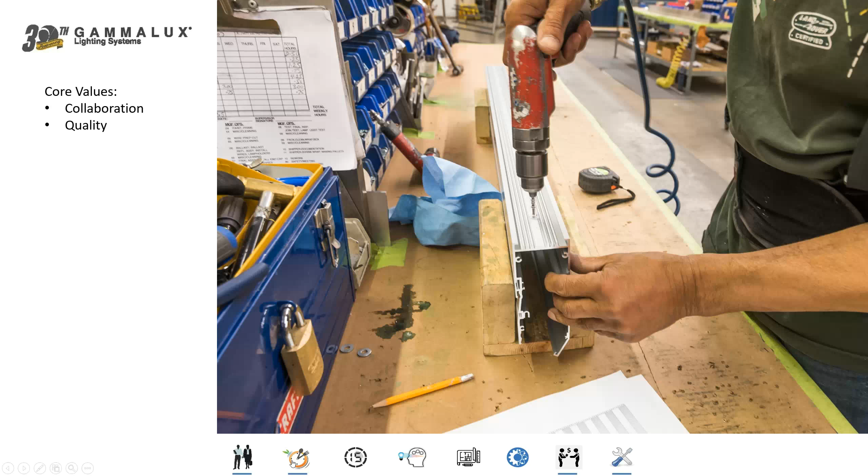And then lastly, integrity. The truth is sometimes things go wrong, and it's on every manufacturer to go about things in a conscientious manner, to be responsive when it looks like maybe even things were their fault. And so at Gammalux, we dive in. We want to understand what went wrong so that we can come up with a practical solution, because that's how we build confidence in others, by being responsive to their needs. So one of our core values of collaboration, quality, and integrity is going to be on each one of these pages, which I think is a good reminder of why we operate the way that we do.

Our most popular product line is the G-Beam or the Gammalux Beam series of fixtures, and this is that group of square and rectangular forms that's been so popular over the last 15 years or so. Now, the truth is there are multiple manufacturers that make very, very similar stuff, and so it's difficult for a manufacturer to differentiate themselves simply based on product, because the reality is as soon as they reveal a new product at LightFair, within just a few months, there are other manufacturers making the very same thing. So for Gammalux, what we figured out is how to create value within a project and help the other people that are involved in that project to do their very best work and possibly build their reputations along the way.

So as an example, we'll take a look at this particular situation where we've got fixtures coming up the wall and across the ceiling. This is a very common type of installation these days, recessed fixtures in the walls and in the ceilings in a pattern. But what's uncommon is the fact that the wall and the ceiling don't touch each other. This is very unusual. Now, this was not our idea. This was the architect's idea to convey the concept of the ceilings floating up and down on rails of light at Schindler Elevator Corporation headquarters, where they make elevators. And so now, because the walls and ceilings don't touch each other, that means there's going to be a gap between the two. It's about a 3-inch gap that was left.

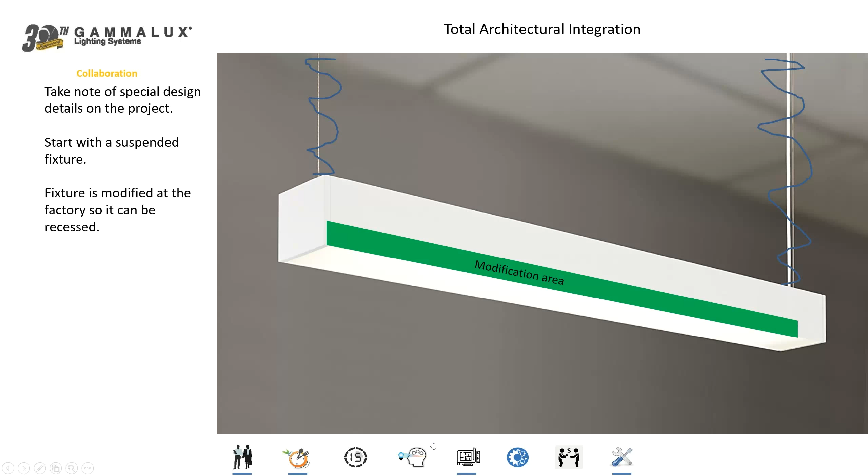So rather than using a recessed fixture, what we did is we took a suspended fixture with smooth sides on it, and we modified that fixture just in the area where it needs to interface with the wall or interface with the ceiling. But we did not modify the fixture in the area where it was going to be exposed inside that 3-inch gap. And what this does for us, it now allows us to take what used to be a suspended fixture and recess it. Now, when we do that, it's the smooth side of the unmodified portion of the housing that's actually visible inside that 3-inch gap.

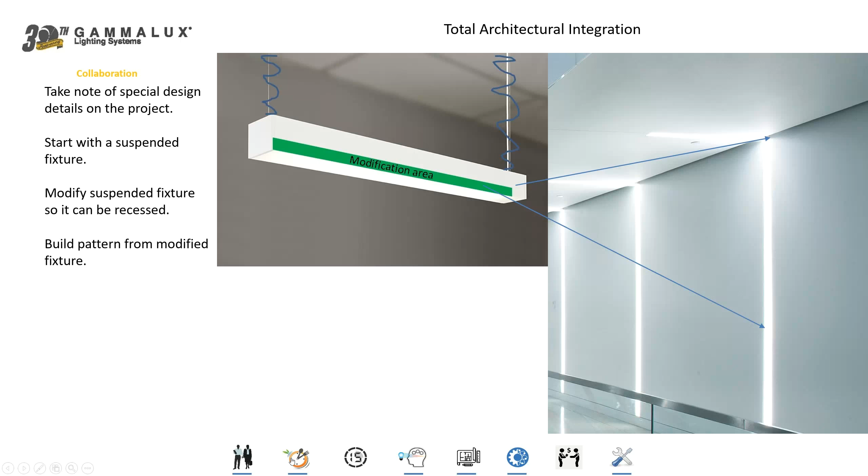Now, as you're considering projects like this, you also have to be realistic about price, and of course, VE conversations definitely come into play. So, when you're considering a VE, you also need to be conscientious of how that other manufacturer operates. See, most manufacturers are going to provide 2 fixtures, one in the wall and one in the ceiling, and then it's up to the installing contractor to get them to join together.

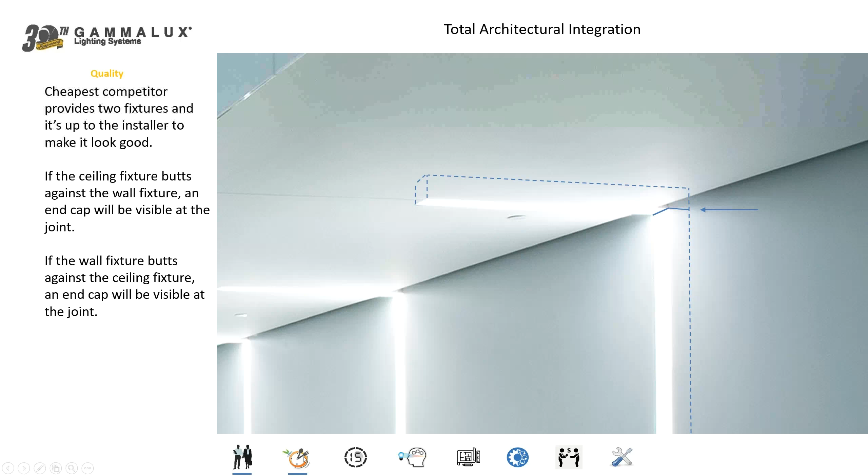Well, the problem with having 2 separate fixtures is that the fixture in the ceiling is going to have its own end cap. And then when it's butted up against the fixture that's in the wall, you'll see that visible end cap. Or if maybe the fixture that's in the ceiling extends into the wall, well, the fixture that's in the wall is going to have to butt up against the bottom of that ceiling-mounted fixture, and again, you'll have a visible end cap.

Now, this is certainly something you have to avoid, where the installing contractor doesn't know that these are going to be 2 separate fixtures, and then the fixtures arrive at the job site, and the contractor has to try to figure out how these are going to be installed in the space, and sometimes the solutions are not so pretty. So we want to avoid that.

Now, maybe a better manufacturer, rather than providing 2 fixtures that kind of get butted up against each other, might create a miter joint that the installing contractor has to put together back behind the wall and above the ceiling. And of course, in theory, this works out, but in reality, it could be quite difficult.

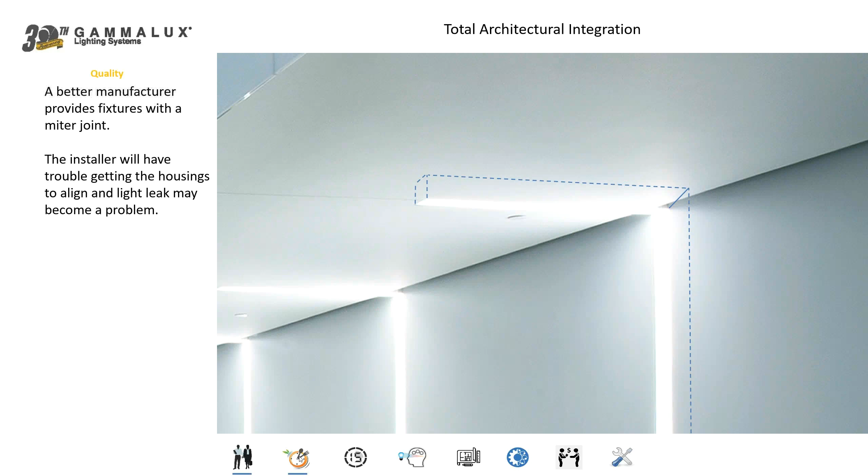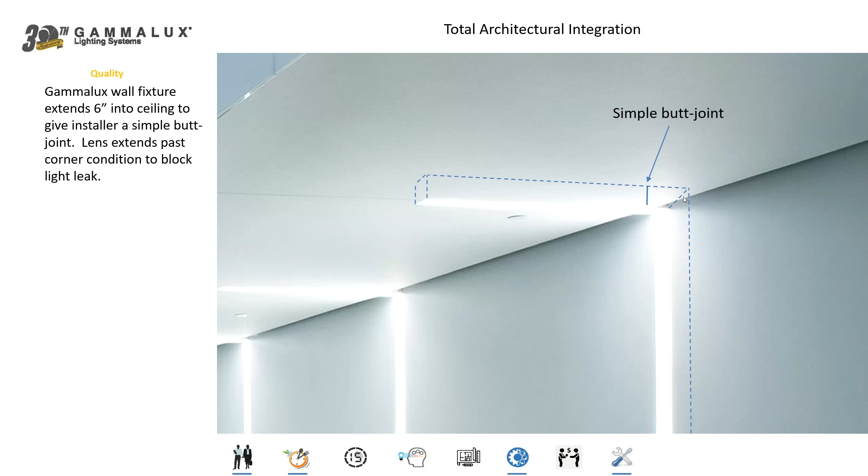So at Gammalux, what we do is we actually provide an L-shaped fixture that comes up the wall and across the ceiling a few inches, so that the installing contractor is simply working with a very simple butt joint between those 2 elements, the recessed ceiling-mounted fixture and the one that's coming up the wall and across the ceiling. Now, we miter cut and weld that corner at the factory as a perfect 90 degrees, so we ensure that everything is going to fit and work properly in the space without any guesswork and without any, how shall I say, beat to fit in the field on the part of the installing contractor.

Now, this could potentially cause a lot of problems, because every distributor and contractor who are bidding on these jobs, they all have different interpretations of all the parts and pieces that are necessary in order to be ordered, so that they can complete that pattern. And so what ends up happening is they send inconsistent quote requests to the sales office. Now, the sales office can only answer the questions that have been given to them, so they're providing different answers to all the distributors that are requesting quotes on this thing, and it creates this inconsistency in all of the quote requests. So what we want to do is avoid those problems by actually working with the original design intent from the designer.

What we want to do is find out the original design that was dreamed up, and we want to provide what we call a development drawing. This development drawing takes all the details as we know them at this time, all the dimensions, the angles and such, and we're going to create for you a development drawing with all of the engineered details as part of that drawing. Now, along with that entire pattern of fixtures drawn from an engineering standpoint, we also provide a complete part number for the entire pattern of fixtures. One part number which includes all of the components. And you see that this makes sense.

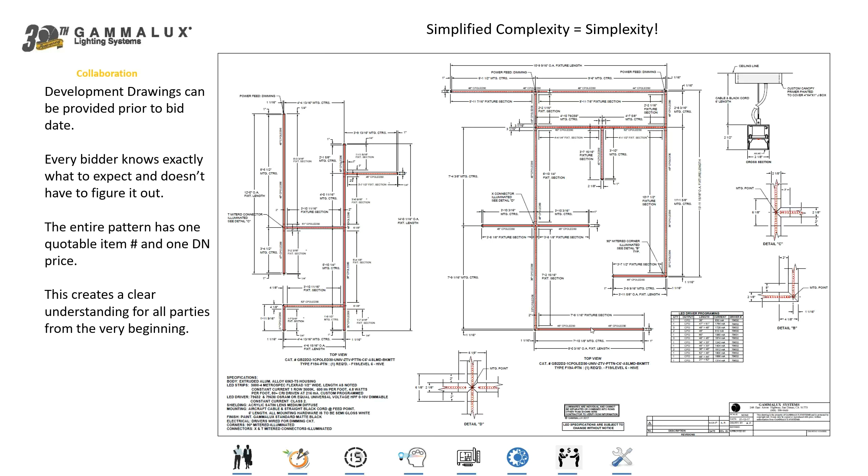So, along with the one part number for this entire pattern, we also provide one quotable price. And once the sales office adds the distributor and contractor markups, that net purchase price and installed price can be given to the specifier to then be passed on to the owner to create a real understanding of what this pattern should actually cost, rather than dreams and hopes and maybe it's within the budget. So we want to handle those things with knowledge from the very beginning, and the development drawing helps us to do that.

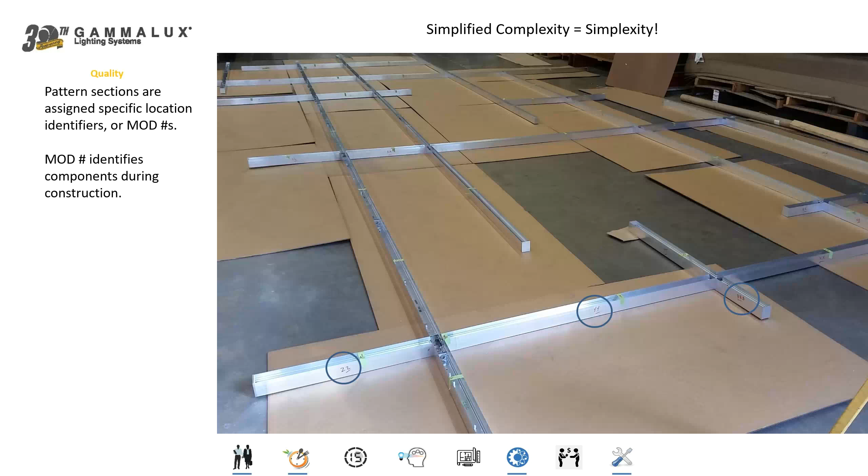Now, because this is all one part number, obviously we have to identify all the individual components in that pattern of fixtures, so we apply what we call mod numbers, or module location identifiers, to each of the components in this pattern of fixtures. Now, this mod number follows each of those components through the entire production process. So again, we at the factory, as well as the customer, know exactly where everything is supposed to go in that pattern of fixtures.

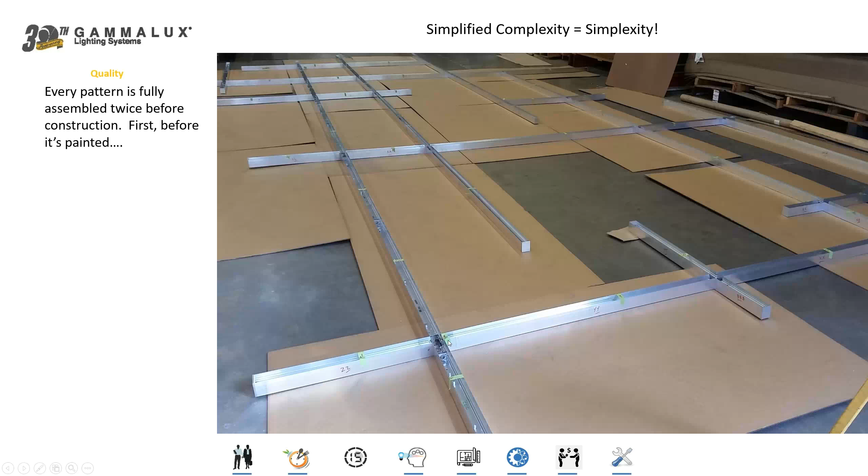Now, everything that we build at Gammalux is actually fully assembled twice before we pack it and ship it. First, before it's painted, to make sure all the dimensions are correct, make sure all the joining mechanisms line in and lock together the way they're supposed to, all the angles are correct.

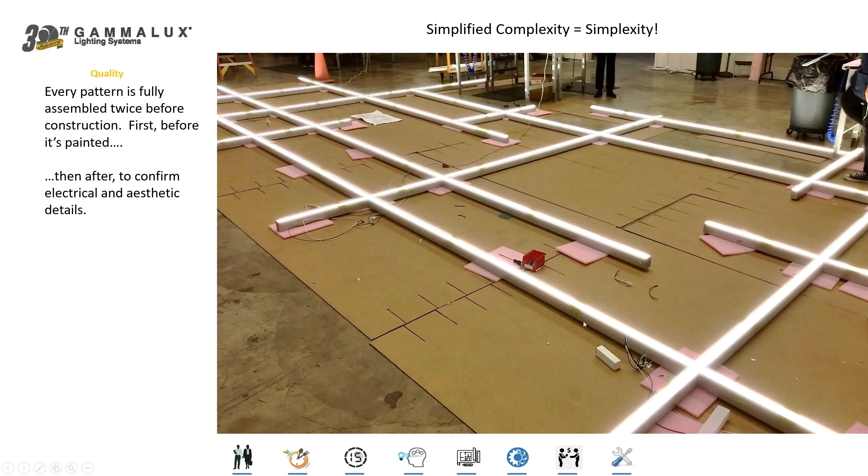Then we take the whole thing apart, paint it, put in the electrical, and reassemble the entire thing, checking every circuit, every battery pack. We're going to dim the whole thing up and down. We check the occupancy sensors, the daylight harvesting sensors. We even check the finish of one housing to the next in continuous runs to make sure that everything looks and performs the way that it's supposed to before we pack and ship.

Now, those fixtures are each marked with their individual location identifier, so the installing contractor knows exactly where everything goes at the job site. We include that location identifier on the fixture itself, also in the UL label, the identification label that's inside the fixture. We put that location identifier on the bubble wrap of the fixture, and then on both ends of the carton. So if you're looking at this side of the pallet or that side of the pallet, you will actually know exactly what's on that pallet.

Now, before we ship it out, we take a digital photo of that pallet to ensure that we know exactly what was on the pallet, and we can also provide that to the customer. And maybe if in case one of the modules gets lost, we can show exactly where it was on the pallet, and hopefully they're able to find it at the job site rather than having to reorder that one element, and then we have to wait for a lead time for that item to be built.

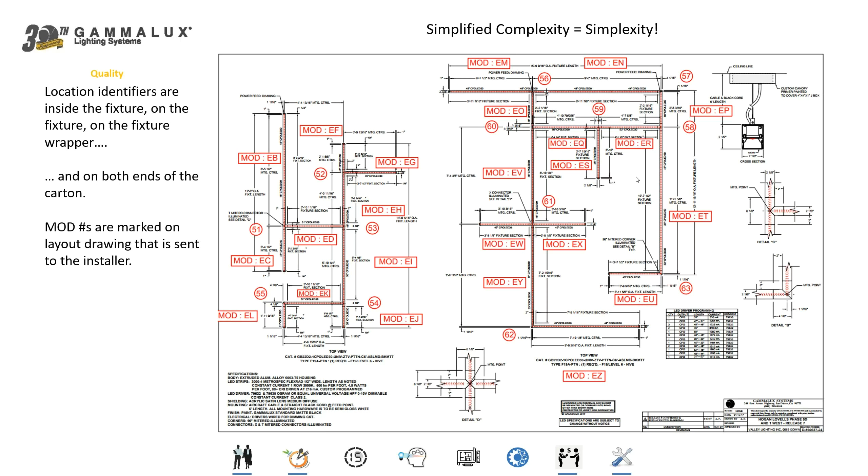Now, when we send the pallet of fixtures, we also provide a new layout drawing with all of the mod numbers or the location numbers overlaid onto that layout drawing, so that, again, the installing contractor knows where everything goes. As much as possible, we try to include all of the fixtures that are going to be required in that pattern or in a continuous run on the same pallet.

We don't want to send all the 4-footers on one pallet, all the 8-footers on another pallet, and then the hanging parts are shipping out next Tuesday, like some of our competitors do. We want to make sure that everything is on the same pallet as a complete package so the installing contractor can work quickly and efficiently at that job site.

As a matter of fact, every job that ships out ships on a custom-made pallet that is 2 inches longer and wider on all 4 sides than any carton on the pallet. Because we know exactly what happens. You know, if we make a 10-foot fixture and put it on an 8-foot pallet, you know what's going to happen in shipping, right? You're going to have damaged ends on your fixtures.

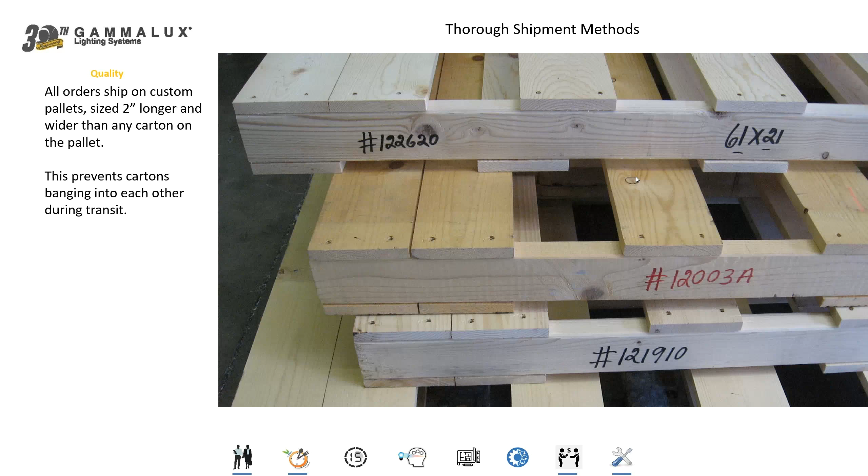So even if we make a 4-foot fixture, we don't put it on a standard 4-foot pallet. We'll put it on a custom-made 4-foot 4-inch pallet so that there are 2 inches of air gap all the way around the carton. So as the shipment is rumbling across the country, it's the pallets that are banging together and not the fixtures themselves.

Now, we can integrate other manufacturers' components into our fixtures.

Say, for instance, you're doing a job where you want linear lighting systems and then you also want some track heads. Well, we can actually work with that track manufacturer to get those track heads built in as part of our linear lighting system. What this does for you, it cleans up the ceiling system, which is very nice, right? You don't have all that mumbo-jumbo all over the ceiling, so it cleans things up, very nice for the architect or the interior designer. It still maintains all of the features that those various lighting elements have, so the lighting designer likes that. You still have all the same lighting characteristics in the space.

Now, because this is all built in as one housing, it's one part number for the distributor to order, which is nice, and also one shipment for them to have to track, which is also very nice. And then for the installing contractor, it's one housing to put up in the space instead of multiple. So what we're doing here is we're creating value within the project using all the components that would have normally had to be used anyway, but building them in such a way that it actually helps everybody else to work more quickly and efficiently throughout the job, creating value within the project.

Now, if you want to have fixtures embedded into the walls or into the ceilings, usually you don't want to see that flange that goes all the way around the fixtures, right? That kind of frame that's visible. So you specify what you call a flangeless fixture. Well, those flangeless fixtures do have a flange on it, but it's a mud flange. It gets mudded over and painted out here, so you don't see it. Well, we have the same thing as well.

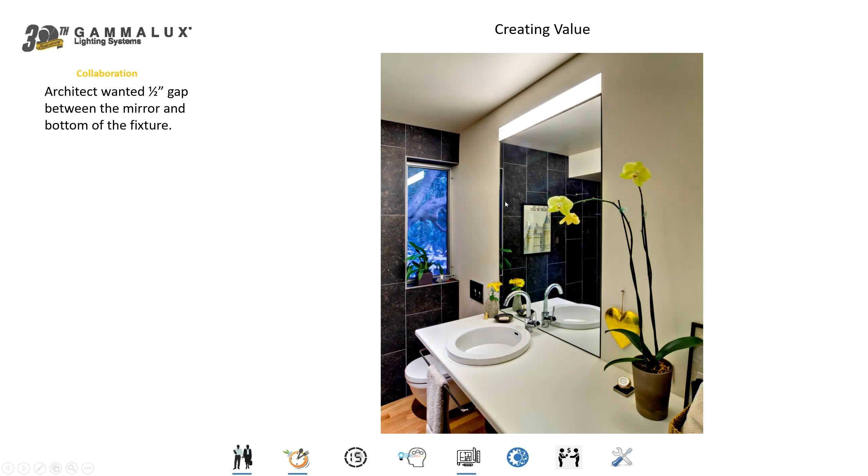Now, let's talk about a little modification to that mud flange. Here's an application in an architect's private residence in his guest restroom where he has this half-inch reveal or half-inch gap all the way around the mirror. So the mirror's kind of floating in space. Now let's take a closer look, and you can see that gap here. Now, normally we would put our mud flange around all four sides of our fixture. But if we put the mud flange on the bottom of the fixture, then you would actually see it in the gap between the mirror and the fixture. And obviously that's not desirable.

So now it would be the responsibility of the installing contractor to rip that mud flange off the bottom of the fixture and fill in the holes that he just drilled in, and then cover everything with a coat of touch-up paint, and all this additional work just because improper collaboration was going on. So if we can understand what's going on in the space, you let us know, oh, there's going to be a half-inch gap between the bottom of the fixture and the top of the mirror, then we'll just put our mud flange on the sides and the top of the fixture, but not the bottom. So we will modify our fixtures as necessary for any particular job, and most of the time there's no additional cost associated with this.

Now, if we're building fixtures into the architecture coming around all four sides of the built environment, obviously you understand we have to have exact field dimensions for this kind of thing. Now, we will quote to CAD dimensions, but we do not build to CAD dimensions because we know these walls will not be built to CAD dimensions. So we do require a signature approval from the installing contractor, not the architect, not the designer, not the salesperson, not the engineer, but the installing contractor on those corner-to-corner dimensions.

Once we get that signature approval of those dimensions, that's when we can start building the fixtures. Now, the gyp does not have to be in first. As long as the studs are up, they'll know the thickness of the gyp that they're going to use, and then they can calculate what the corner-to-corner dimension will be.

Now, here's an application where we're taking our fixture, we're assembling everything at the factory. You notice that we have smooth sides on this fixture. It's upside down right now. We're putting all the LEDs in. You notice the smooth sides, which means this used to be a suspended fixture, and we're modifying it. It's going to come into play in here just a minute.

Now, we're adding a flange, a cover flange, to the bottom of this fixture, but notice that the cover flange actually stops right here. And then out here, we have no flange. And then you see the shadow again. The cover flange starts up again, and then there's no flange, and then we have flange, no flange, flange, no flange. So what's going on here is the flanged portion of the fixture is actually going to be embedded into the ceiling, and the non-flanged portion of the fixture is actually going to be suspended outside of that ceiling. And I'll show you an application photo in just a moment.

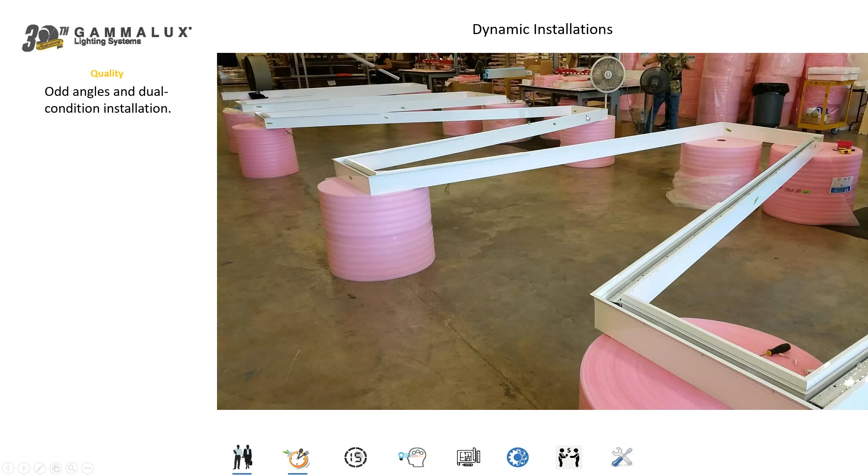Now, as I mentioned, everything we build at the factory is fully assembled twice because you need to know that we're handling things like light leak here at the factory, because a factory solution is always better than a field solution. This is one of the reasons why we operate the way that we do. See, Gammalux was founded by engineers, and engineers are all about attention to detail and making sure the job is done correctly. And so this ideology of an engineering mindset has permeated its way through the entire organization. This is why we're very much into the fine details as we construct these fixtures.

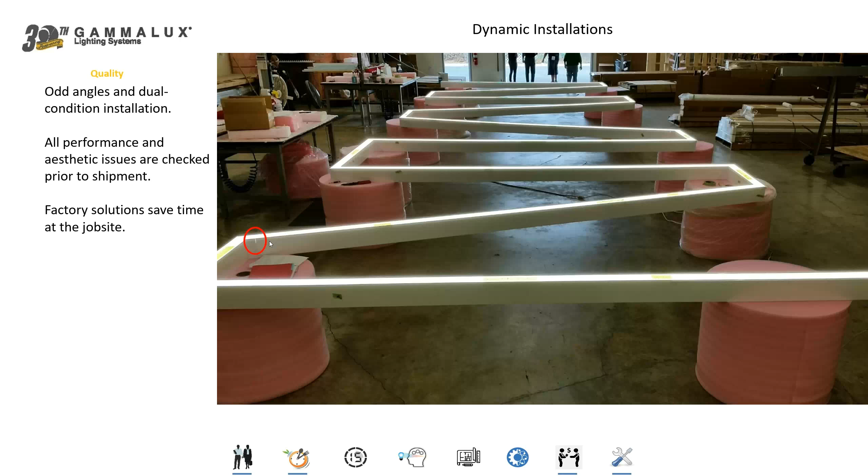All right, so here we are. We're up on that second floor walkway, and you can very clearly see the fixtures are recessed and suspended, recessed and suspended. All right, now here's where things went wrong. See, this job was originally specified with our mud flange, where the fixtures have to be installed into the stud framing first, and then the gyp is built around our mud flange, and then it's mudded over and then painted over, and you wouldn't see it. It's very beautiful. But the problem was the installing contractor ran out of time for whatever reason. Maybe they sat on the order too long or didn't understand what was specified. Who knows? There's all kind of reasons why orders get delayed.

But in this particular case, they didn't have time for us to provide the fixtures and then build the gyp around the fixtures. So what they said was, hey, Gammalux, we want you to switch your order from the mud flange over to a cover flange, which you see here. And while you're back at the factory building those fixtures, we'll go ahead and we'll put up the gyp, and we'll cut slots in the gyp in the same dimension as what you're building at the factory. And in theory, that's going to work out great. But truth is, sometimes reality isn't as good as theory, and that's exactly what happened here.

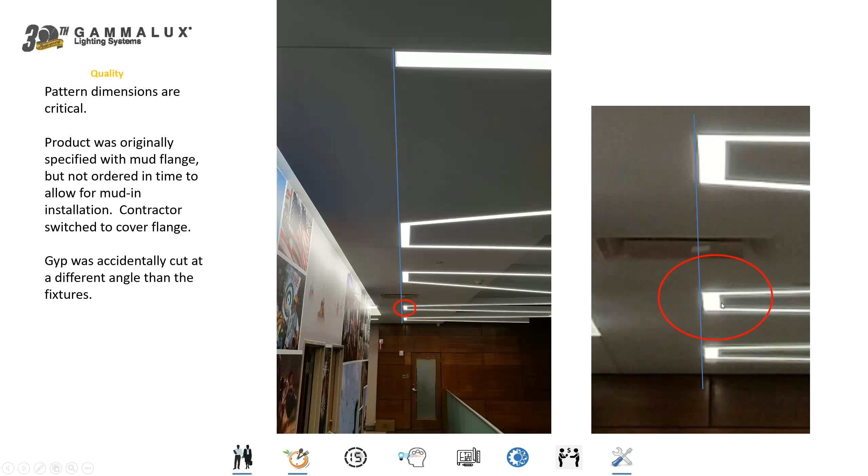Let's draw a straight line and show you what happened. In this particular case, you can see that there's a little bit of an inconsistency right here. You see this angle? The problem here was that they cut the slots in the gyp at a different dimension than the fixtures were built, and they didn't have time to go back and correct it. And this meant that they had to hyperextend the corner of that fixture, and now when you hyperextend the corner, the lenses don't fit inside the corner, and the visible flange, which they thought was going to be a solution to that problem, now there's gaps in the flanges. Now, eventually, those problems got solved, and we were able to help with that, but the truth is this kind of thing shouldn't be happening in the first place.

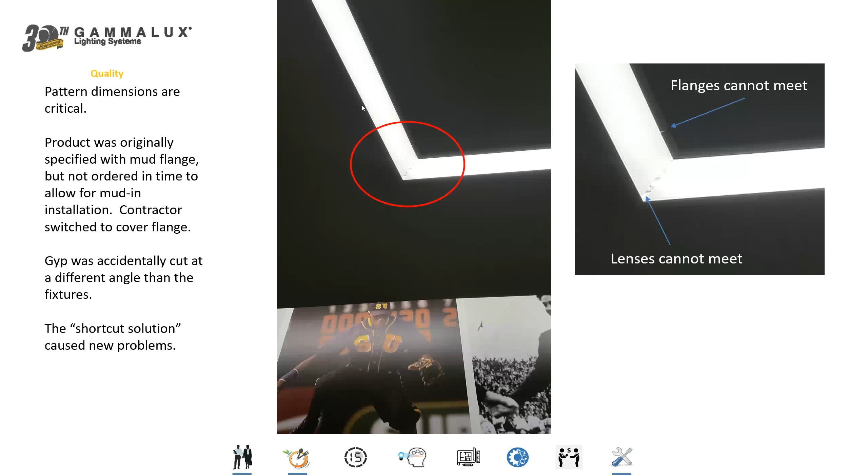With proper collaboration and letting us know when the product has to be on site, we can set a reverse timetable of when we need those signature approvals so that we have time to build product, and the installing contractor has time to put them up so that the drywall guy can put up the drywall and mud around the fixtures. With proper collaboration, everybody wins. Of course, otherwise, everybody loses. So we want to avoid that if possible.

Now, here's an application where we took a standard suspended fixture, a 4-inch wide, 4-inch tall suspended fixture on cables, and we built it into patterns at the factory. Now, again, we don't want the installing contractor putting together all of these miter joints because that would be very difficult to do in the field.

So what we did is we made L-shaped fixtures with a butt joint right here, or a V-shaped fixture with a butt joint right here, or a T-shaped fixture with a butt joint here or here or here. We want the installing contractor to work with butt joints wherever possible, and there's just a simple nut and bolt that holds everything nice and tight. We don't want them putting together miter joints.

Now, obviously this is a very unique installation, but this is not a custom fixture. And a VA Medical Facility in Seattle did not need to pay custom dollars to have a fixture embedded or installed on the concrete wall in their parking garage to point people in the direction of where they need to park. Now, because this is a parking garage, we don't know about the safety and security of that place. There could be vagrants, vandals or whatnot.

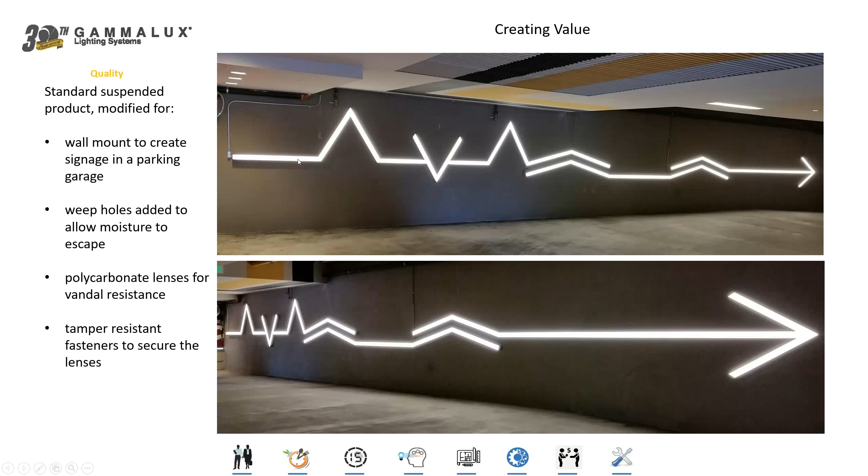So we can actually include polycarbonate lenses in the construction of our fixture. Very vandal resistant. And we can hold those lenses in, because normally our lenses just snap into place. We don't want people snapping them out. So we can hold those lenses in with tamper resistant fasteners as well. Now, in this particular case, because the fixtures were surface mounted on that wall, we were able to drive the fasteners in through the top and the bottom of the housing to hold those lenses in, rather than shooting the fasteners through the face of the lens where they would create a shadow and kind of an undesirable effect.

Now, all of our fixtures can be built as individuals or in patterns or in continuous runs. Now, certainly in those continuous runs, we will fully illuminate those runs of fixtures without any gaps and shadows at the ends or in the middle of the run. To my knowledge, we're the only manufacturer that can make a housing up to 24 feet long all in a single piece and support the whole thing with just 2 cables.

The reason why we're able to do that is because we're using very rigid material, extruded aluminum. And once it comes out of the die in that shape, it wants to maintain that shape. It doesn't want to bend into some other shape. And so we use this to our advantage. Now, if it's a tall rectangular housing like this one, it has a lot of rigidity to it. So we're actually able to support that entire housing with just 2 cables.

Now, if you specify or order a 24-foot run, we're not automatically going to make it single piece. It's going to come out as 2 12-footers or 3 8-footers. But if you specify this as a 24-foot single-piece housing, that's how we're going to make it. And if it has enough rigidity, we will provide only 2 cables to support the thing. If it's a flat rectangle, it doesn't have a whole lot of strength, so we'll need the 3rd cable in the middle. But generally speaking, we want to talk about those things on an individual basis so we can figure out the best way to build them.

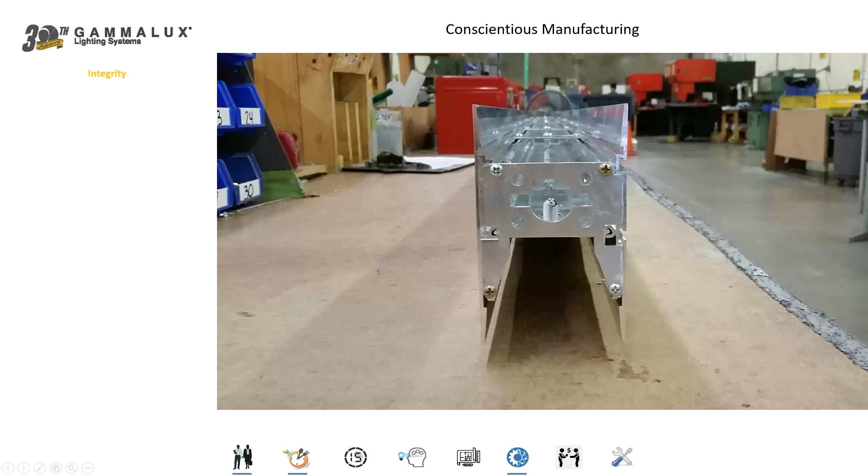Here's the end of a fixture that's going to be joined to another fixture in a continuous run. This is our joiner plate, and there will be a joiner plate in the next fixture with 4 holes in these positions, and just a nut and a bolt in each of those 4 holes in both plates ties them together and holds everything nice and tight.

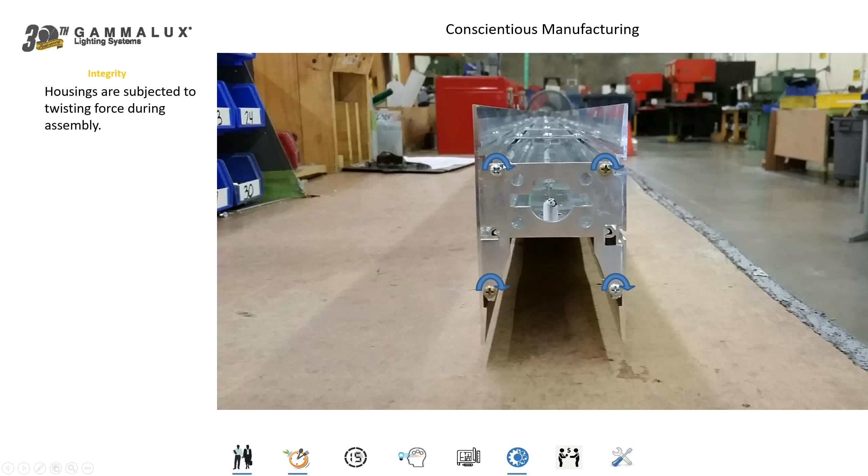All right, now to join this joiner plate onto the end of our housing, of course, we have to screw it on. Now, you know how screws go in, right? Righty-tighty, lefty-loosey, right? And so what you might not know is at the very last moment of tightening that screw into place, it actually imparts a very subtle twisting force into the housing. Now, it doesn't deform the housing or bend it or anything silly like that, but it gives it a little bit of a torque, a lean, a desire to twist.

Well, the problem with that is when you've got multiple joints in a continuous run and you've got 2 of these plates per joint, you're actually increasing the possibility of a twist in that continuous run. And I see this kind of thing all the time, especially in airports with long runs of fixtures, maybe over the ticketing counters and such, where I look down that run of fixtures and I see this very subtle twist in the runs of fixtures, and obviously you've got to avoid that kind of thing.

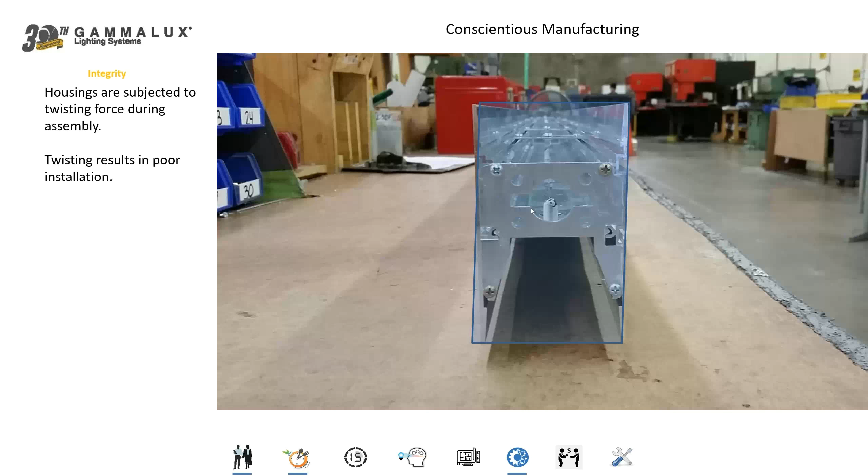So what we do at Gammalux, because we're owned and run by engineers, we understand about these physical forces, so we will actually use right turn and left turn screws to hold those plates into our fixture. And by doing this, we negate that twist. We equalize that torque at every joint so that none of those joints are creating a twist in the long run of fixtures.

Now, we paint over those screws. The installing contractor doesn't know anything about these screws. You can imagine them trying to install this screw right here, trying to screw it in. It never goes in, and they complain about it, right? So we don't ask contractors to put this stuff together. We paint over those screws. The contractor is just using nuts and bolts right here with these 4 holes.

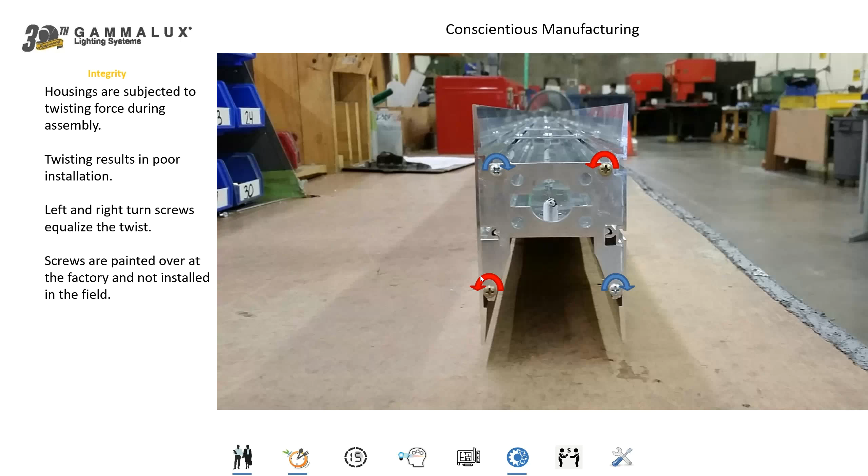But we want you to understand, this is the manufacturer that we are. We are very much into the fine details to ensure that you don't have problems on the job site after the product ships.

Now, you can imagine, this is the kind of thing that most manufacturers don't want anything to do with because they're not in this kind of business. See, as small manufacturers get bought up by the big guys, very soon all of their special characteristics go away. Well, Gammalux is not for sale, and we run with an engineering mentality. We're interested in this kind of stuff. We want to figure out how to get it done. So here's how we do it.

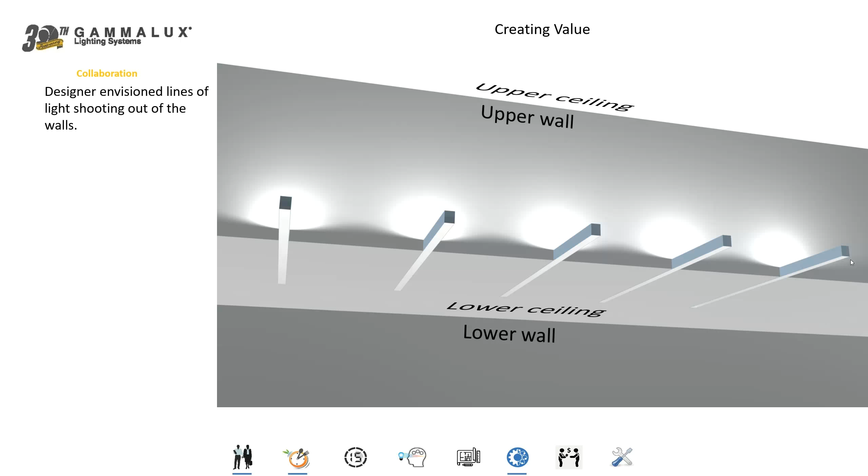We're going to take a 12-foot-long suspended fixture like every other manufacturer has. You can name them alphabetically. You know exactly who's in New Jersey, who's in California, what manufacturer's in Colorado. You know all of these things. Every manufacturer has basically the same materials. But how you use your materials and use your resources differently than the other guys, well, that's how you create value. So what we're going to do is take the same type of product that all the other manufacturers have, we're going to modify it the way that Gammalux does.

He's actually looking at something that he helped to develop, and now he has a sense of ownership in this job, a sense of partnership. And that's what we want. We want partners, people who are working with us to attain the same goal. Now, in the last 4 feet of that fixture, of course, we left it unchanged. This was a fluorescent job we did about 10 years ago or so, but it doesn't matter.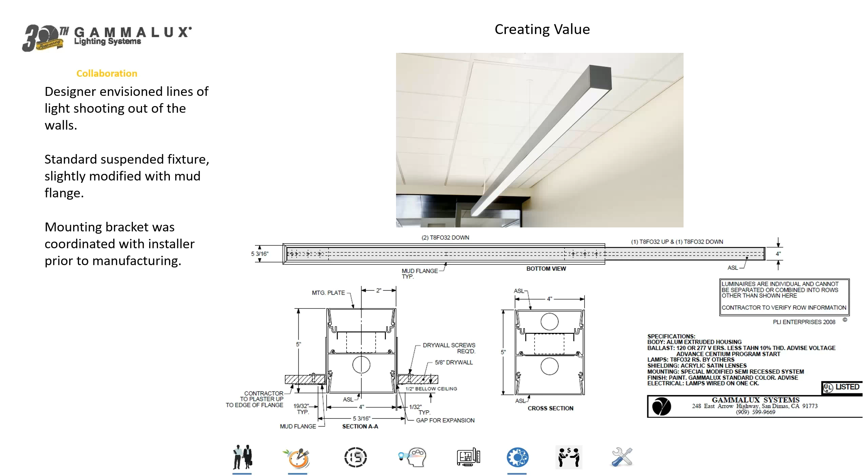It could have been LED as well. The concepts apply either way. So what we're doing here is we're taking what used to be a 12-foot long suspended fixture, and now we're having it embedded into the ceiling with mud flanges and a mounting component that the installing contractor developed, because it's going to help him to work more quickly and efficiently. And the last 4 feet of that single piece housing is cantilevered out to provide bidirectional illumination to illuminate the ceiling above, and no cable support.

This went to the job site at $200 per linear foot, and we never got one phone call from the installing contractor. This is not a custom fixture. This is a standard fixture that's been modified specifically for that job.

And, of course, because of the strain on the ceiling, we need the support cable to support from above. But if it's only a couple feet sticking out of the ceiling, we don't need the support cable. So it just depends on what's going on in the space will determine whether or not we need that support cable.

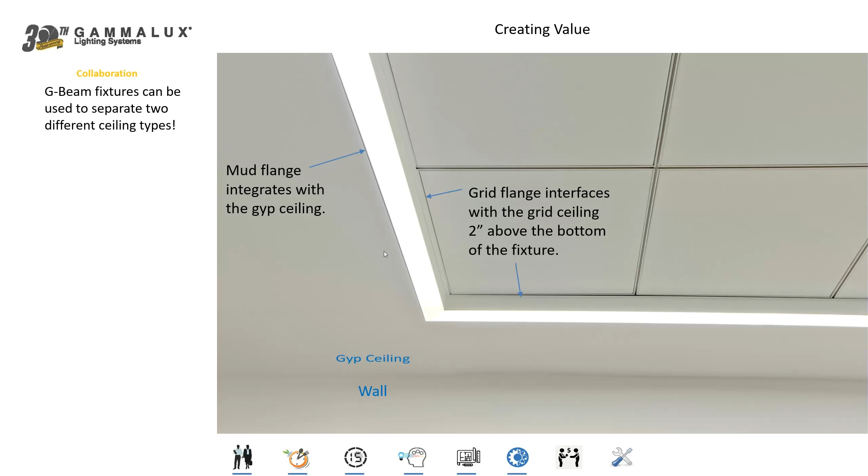We can interface with any ceiling system, wood, metal, gyp, grid, any kind of grid, doesn't matter. Even if it's some kind of system we've never heard of before, if it's a stretched fabric system or it's made of pixie dust, it doesn't matter what the ceiling system is. As long as we can find out what it is, we will figure out how to interface properly with that ceiling system.

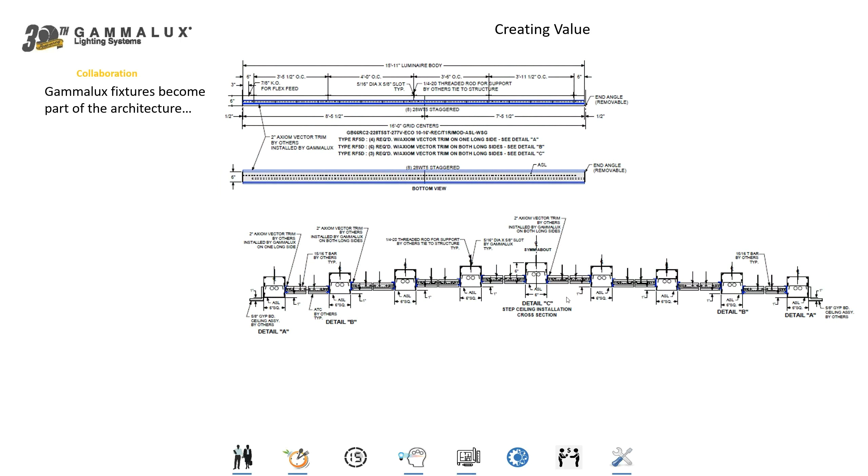Here's an application where we're going and creating steps in the ceiling, coming up to the center and then back down on the other side of the room. Now, if you think about a step ceiling, there's a lot of complexity in that kind of thing. And, of course, all the players involved, everybody thinks they're going to make a lot of money because it's so custom, and the owner should have to pay a lot for it. But that doesn't have to be the case.

See, what we did is we found out what the ceiling system was. In this case, it's the Armstrong Axiom ceiling system, which uses a C-shaped extruded channel that gets installed onto the walls at the ceiling line. And then the grid slides along that channel wherever it's supposed to go, and then they drop in the tiles.

So what we did is we got a hold of that C-shaped channel called the vector trim, and we attached it on the sides of our fixture. That's the blue C-shaped piece here. We attached it on the sides of our fixture at 2 different heights here at the factory in San Dimas. Then we cut everything to the proper length, of course, and we painted it all with the same paint so it looks like one properly engineered system.

Then the fixtures arrive on site and they're installed wall to wall at the height and spacing that they were supposed to be. Then the ceiling contractor gets there and just snaps the grid right into the sides of the fixture. Everything is independently supported. Grid is supported by itself. Fixtures are supported by themselves.

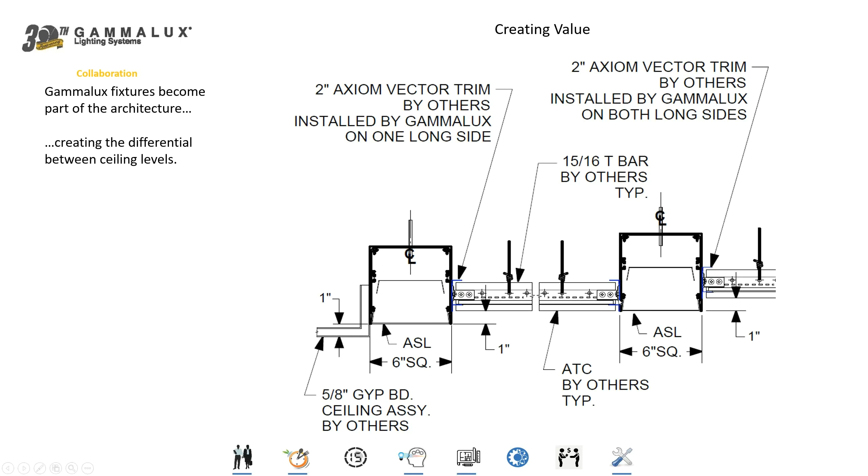So we don't have one resting on the other, but they're all properly interfacing with each other. So you get the benefit of a custom step ceiling without any of the custom dollars associated. So we create value within the project.

We cut those trims down to 1/256 of an inch at the factory. Everything fit together like puzzle pieces at the job site. Now, this required a lot of collaboration leading up to the time that we built the fixtures, but after we built them and they were shipped out, we never got one phone call from that installing contractor.

We're very much into the fine details to have the collaborative calls that we need to. If it's webinars or sending samples back and forth with the installer, we'll be glad to do that, because this is how reputations are built. This is how businesses are made, and we want to be in the dead center of all of that. And that's how we create value within projects, by helping others to do their very best work.

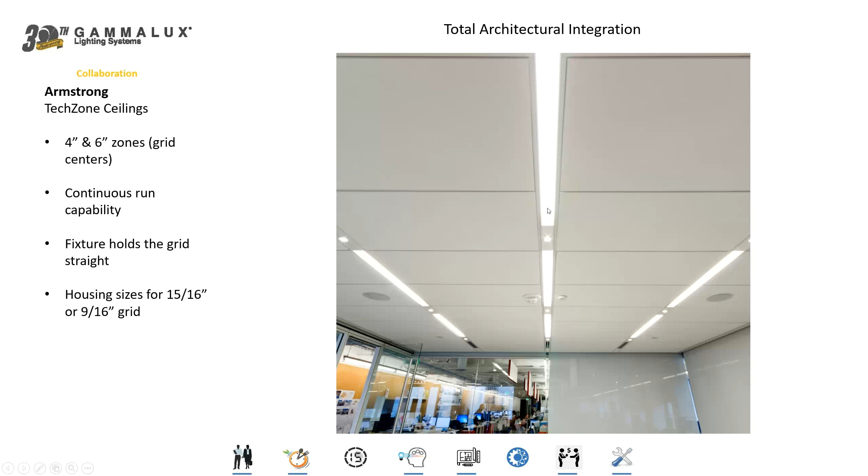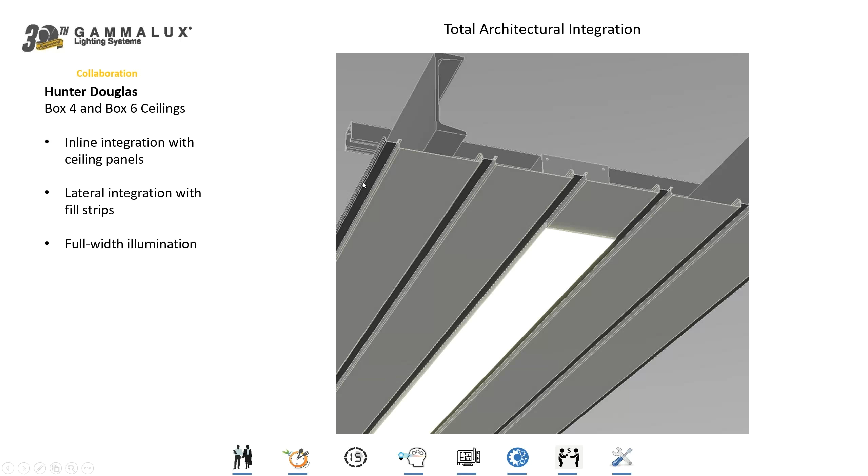This is the Hunter Douglas box series ceiling system, where they have nominal 4-inch and 6-inch panels. We've made our fixture the same width as the panels, so you don't have any inconsistency in the look and the feel of the ceiling system. And then in line at the end of our fixture, we've got a joiner spline to join in line with the cut panel at the end of our fixtures. So you go panel, panel, fixture, panel, panel, panel, fixture, on and on. You've got consistency in the ceiling system.

Now the brackets that we use on the top of our fixture interface perfectly with the universal carrier that holds these panels up. We've worked very closely with Hunter Douglas on all of those fine details, so we can ensure that everything fits together the way that it's supposed to, allowing these brackets to slide along the side of our fixture so that they can interface with the universal carrier wherever it needs to. So the ceiling system is not dependent upon our fixture at all, and the fixture is not dependent upon the ceiling system at all.

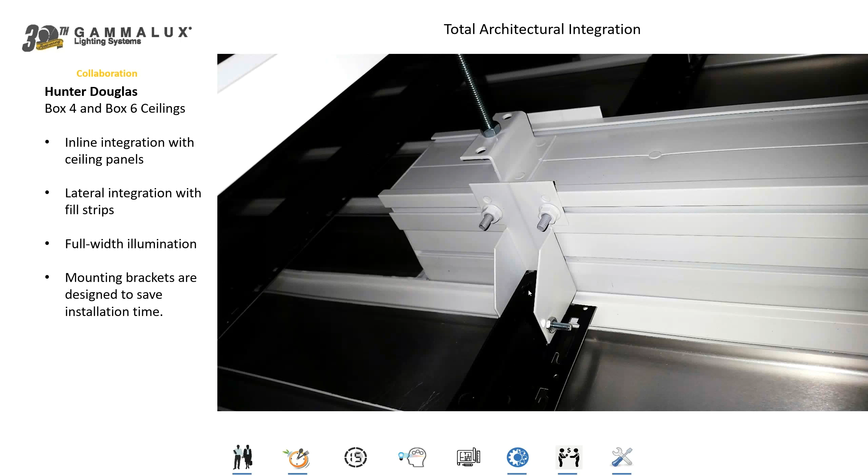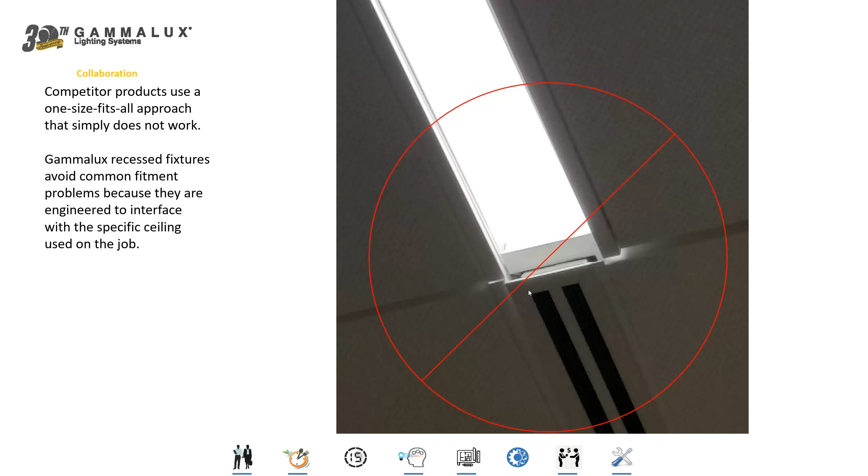Everything works independently of each other, but coordinates properly with each other. Obviously, this is the kind of thing you need to avoid, these one-size-fits-all solutions that are not really solutions at all. We always want to find out exactly what the ceiling system is so we can avoid this kind of aesthetic problem.

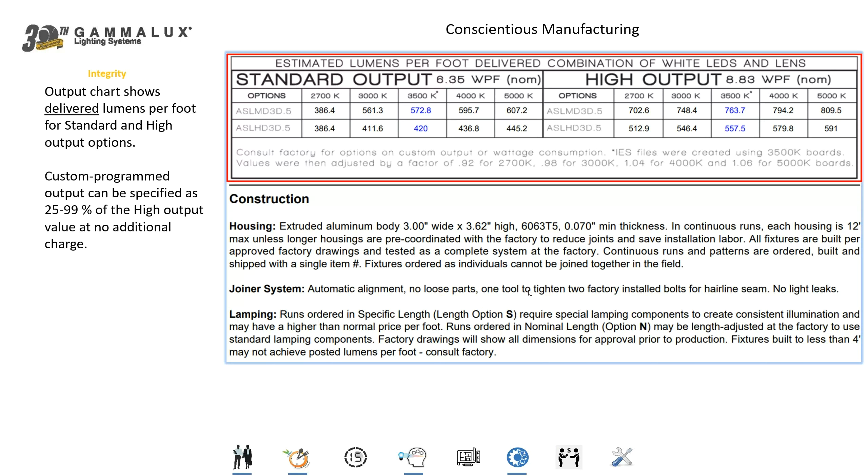Now, if you're making lighting calculations, obviously accuracy is very important. So in our lighting calculation page, we're showing down to tenths of a lumen per foot in all the different output and color temperature and lensing options that we offer. To my knowledge, we're the only manufacturer that provides an image of what the lens looks like in our fixture with the LEDs fully illuminated behind it.

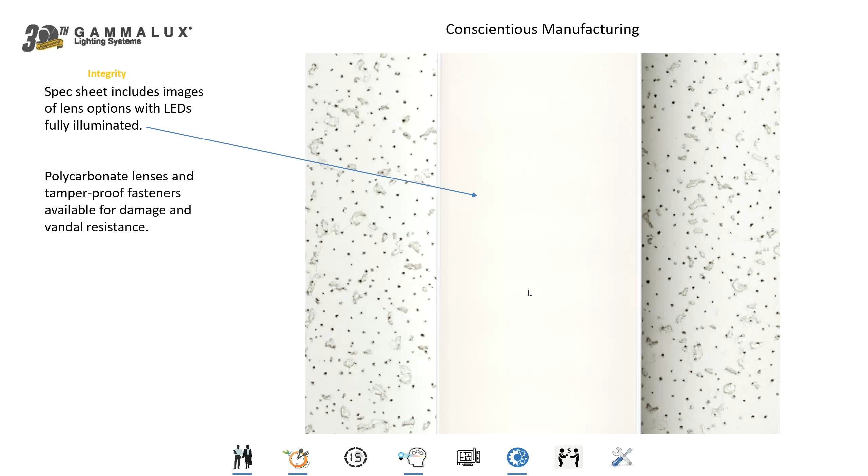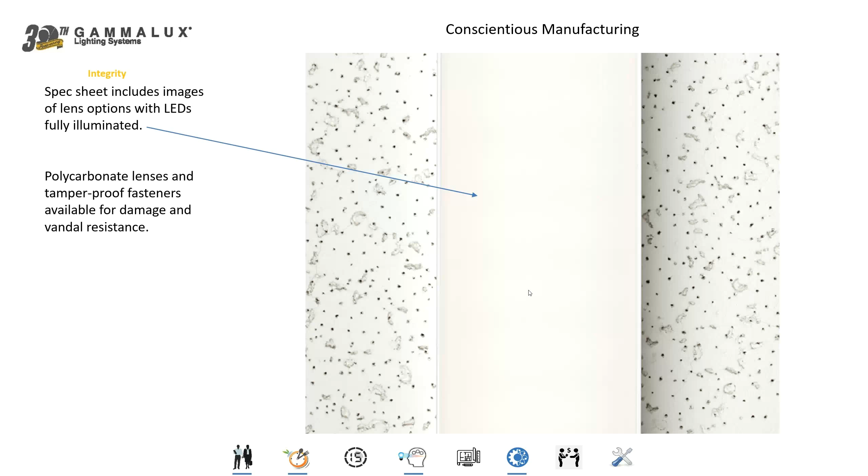This is unique. See, most manufacturers only show that glamour shot of the picture of the fixture in its very best condition. We've got that too, of course, but we also show you an image of what the lens in that fixture is going to look like with the LEDs fully illuminated behind it, because we don't want you to just choose the fixture based on its performance characteristics, but also understand about the aesthetics.

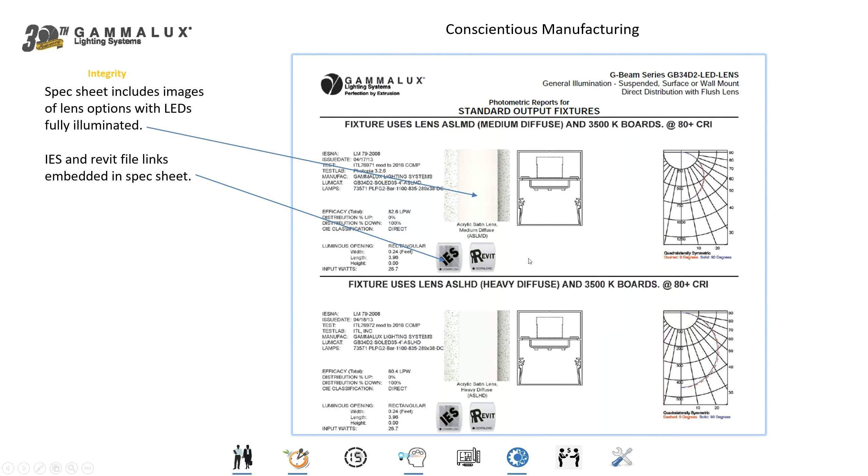Now, right next to that image in our specification sheet, there's the hot link to download your IES file. There's the hot link to download your Revit file. So you don't have to go to the zip file on our website and play catalog number bingo trying to figure out which one is the right file. We make it easily available to you right there in our specification sheet.

Now, if you want to use fixtures of multiple widths in a particular job, well, those different width fixtures are going to have different outputs and different apparent brightness. So what we offer is custom programming of our drivers to get all the apparent brightness to be exactly the same. Or maybe you want all the fixtures to consume no more than 5.75 watts per linear foot. We can do that. We can custom program our drivers for output or input, whatever you need, and we don't charge anything extra for that. It's just additional value that we can provide.

In the top and the bottom of our fixture, rather than having that just standard flat lens, we now offer three-dimensional lenses in the tops and the bottom in our fixtures of 1.5-inch, 2-inch, 3-inch, or 4-inch width. And that's in suspended fixtures as well as recessed. Individuals or continuous runs, or even patterns.

In addition to three-dimensional lenses that drop down from the bottom of the fixture, we can actually regress the lens up into the housing of the fixture at whatever dimension you require. By modifying the exterior of our housing, we can actually create a regressed lens effect inside the fixture, and by doing that, it gives you a great deal of flexibility in aesthetic design.

All of our fixtures can be built for damp location suitability. We do not make wet location fixtures or natatorium fixtures where they're in like an indoor pool area because the chemicals in the air will just eat right through that housing. But if all you need is a damp location where there's going to be moisture in the air, fog, things of that nature, well, obviously we don't want all that condensation to cause problems inside the fixtures, so we treat them a little bit differently here at the factory and make them suitable for damp location environments.

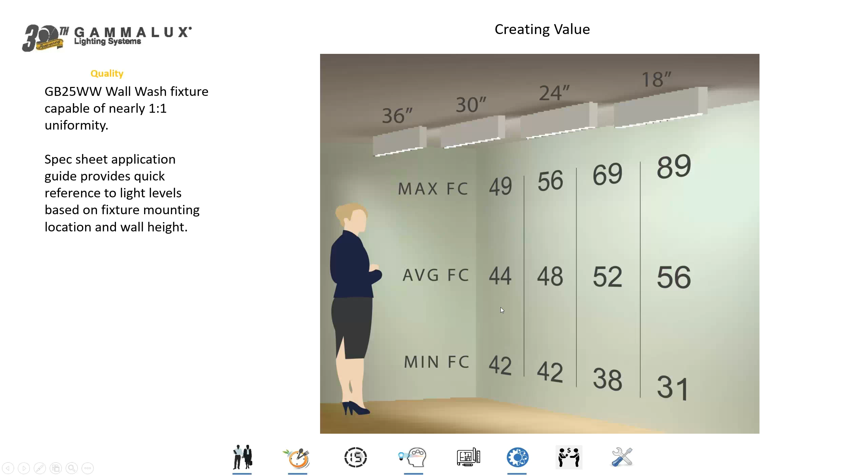Wall washing is a very important part of good lighting design. And obviously, if you're washing a wall, usually you want to wash that wall as evenly as possible. If our wall wash fixture is set 36 inches back from the object wall, in this particular application using 80-50-20 reflectivity assumptions, we can get a max of 49 foot-candles on the wall and a min of 42. That is a 1 to 1.17 uniformity ratio. Absolutely unheard of and unbelievable uniformity on the wall.

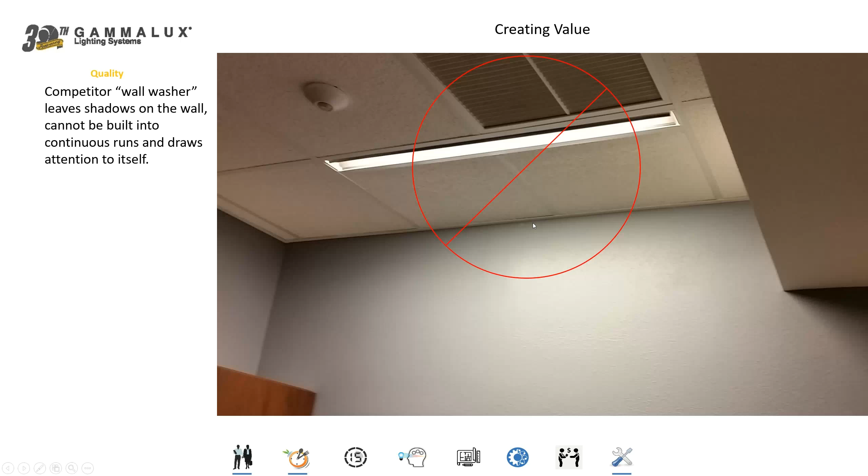Obviously, other competitors have wall wash fixtures, but we don't think too highly of them. Products like this that are bound by the grid, you can't go continuous runs. You can't make them any special lengths so that you fill up that space with the fixture. And look, they're leaving shadows at the top of the wall because they're just insufficient products for a true wall washing requirement. Our product eliminates those problems.

We can build it to whatever dimension is required to create a wall-to-wall installation. We have a kick reflector on the bottom of our fixture so that the top of the wall is always fully illuminated. Also, the kick reflector acts as a glare shield so the people in the room can't see inside the fixture. You can only see it if you're directly below, which is a very nice feature.

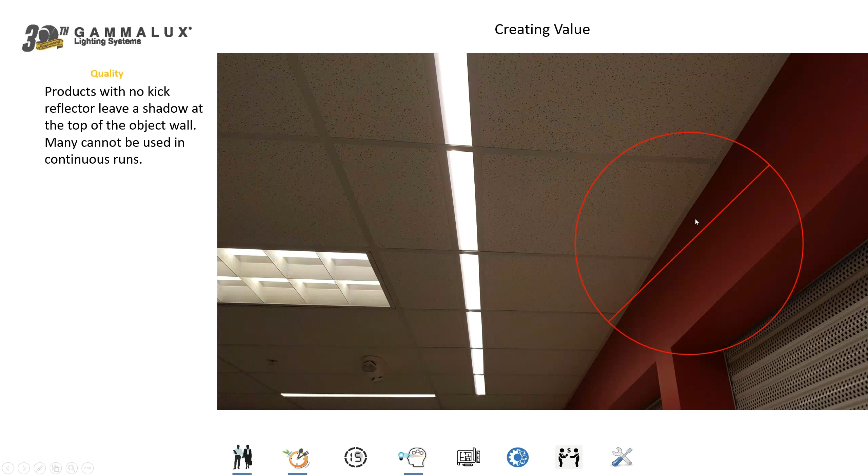Now, if you don't like the kick reflector, this is what our competitor product is going to leave you with: shadows at the top of your wall, your object wall. That's the wall where they've got the company logo or trophies or the picture of the owner's girlfriend or something. Obviously, you don't want shadows on the top of an object wall, and that's why we build our fixture with the kick reflector to illuminate all the way to the top of the wall. These fixtures can be built as individuals or continuous runs, and even comprehensive and complex patterns fully illuminated.

In the world of perimeter lighting systems, we've solved many of the problems associated with perimeter lighting systems. For one, the ugly gap between the back of the fixture and the wall. Many of our competitor products have these gaps between the fixture and the wall because the wall is never straight, but the fixture is. So the manufacturer wants to set that fixture off the wall so it's not touching the imperfect wall and causing aesthetic problems. But they cause a new aesthetic problem, and that is an intentional gap between the back of the fixture and the wall. And obviously that's something that we don't want at Gammalux.

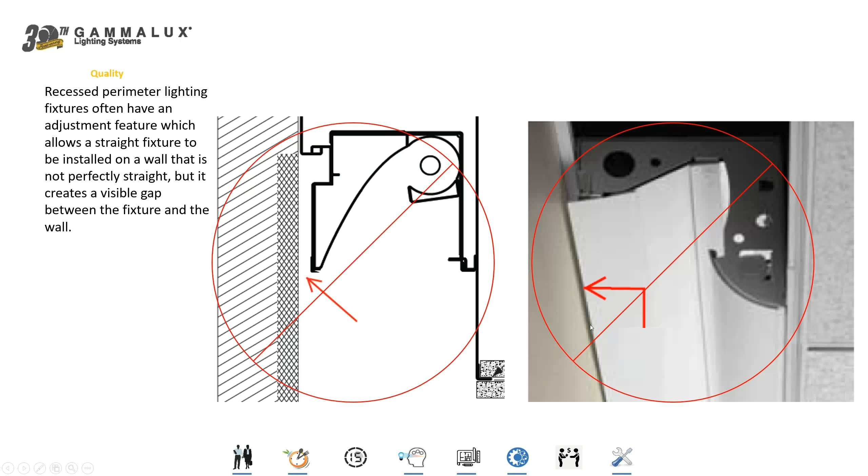So what we've done is we've developed a mud flange for the unfinished wall. And this mud flange gets installed on that unfinished wall just above the ceiling here. Now that mud flange gets mudded over. In the bottom of that mud flange, there's a little bit of a groove, and that groove is there to receive the reflector assembly from our fixture. Here's the end result. You end up with no gap between the bottom of our reflector and the top of the finished wall. An absolutely clean architectural aesthetic that no other manufacturer offers.

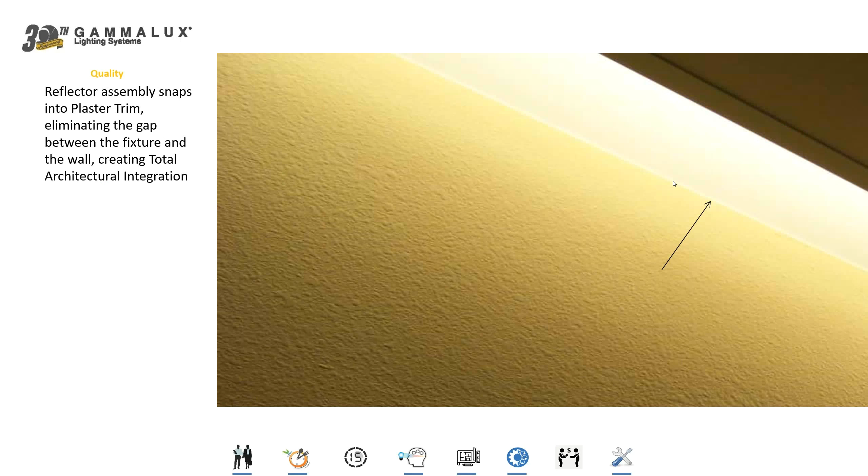Now, we offer two types of illumination with these fixtures, either grazing illumination to shoot light straight down the wall, or ambient illumination to bounce light back off into the space. The grazing illumination, again, shoots light so effectively you're going to get shadows on even the most shallow texture. In order to do this, we use a semi-specular aluminum reflector with a parabolic shape and a reflective lamp barrier. So light that hits this lamp barrier bounces up into the main reflector so it could be shot straight down the wall. Now notice the height of that lamp barrier. The barrier is right here. So the cutoff angle between the LEDs and the top of the lamp barrier is right here, which means that if you have a mirror or shiny tile on the wall, you'll never see the reflection of those lamps on that mirror or shiny tile.

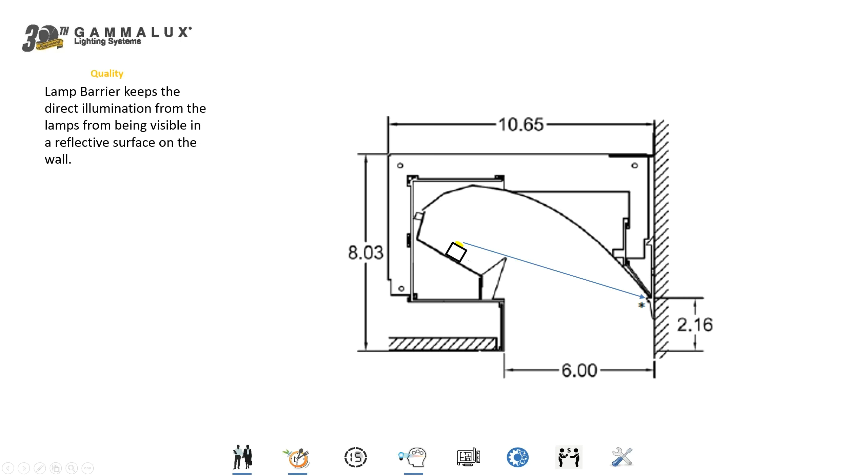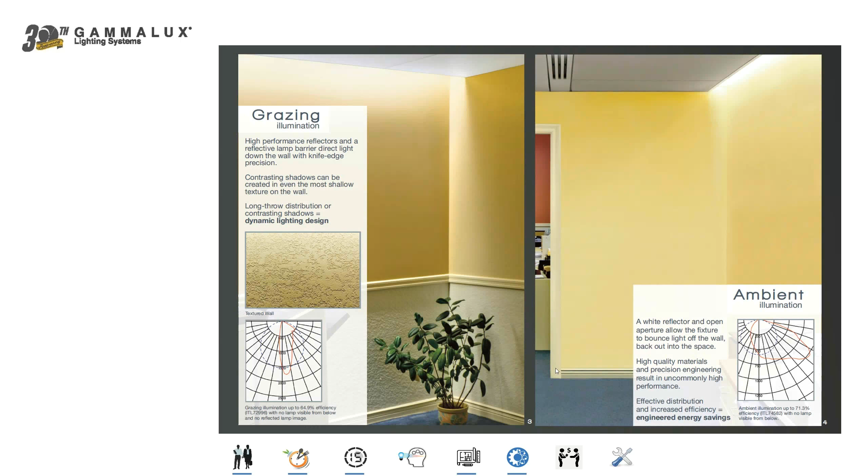But please be very careful. Do not use our grazing optic on a flat wall unless you know that that wall is going to be perfectly flat. Because if it's not, then our grazing optic is actually going to highlight every dimple and pimple on that wall, and that is not something you want. So if you're going to go with a flat wall, we recommend a level 5 finish only. Otherwise, if you have brick or stone or tile or some kind of a textured material and you want to create shadows, obviously our grazing optic is going to do very well with that. In those flat wall scenarios, which are not level 5 finishes, again, we offer our ambient illumination optic, which actually uses the wall as a reflective surface. We're bouncing light directly off the top of the wall to get usable light back out into the space.

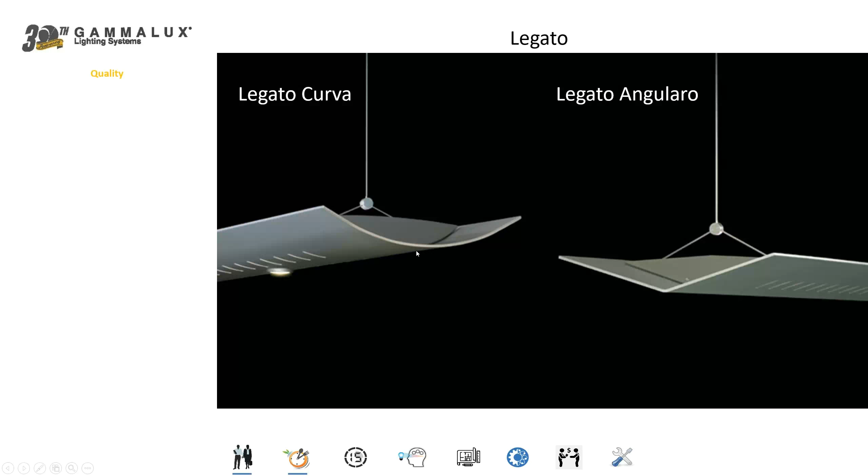Of course, we still have some of our older styles of fixtures. We have the Legato product. These are individual fixtures typically used in a boardroom or a conference room, places like that where they're not going to go in continuous runs because these fixtures do not have joining capability at the end of the housing. We also still offer those older style of fixtures that kind of look like those perforated steel fixtures that were so popular maybe 20 years ago or so. Well, we still sell them because actually our fixture is all aluminum construction. It'll never rust. So people are still using them under canopies in a damp location environment. So we still have that kind of stuff.

As well as fluorescent. We still kept all of our fluorescent designs because we know that not everybody has made the jump to LED, and so we don't want to alienate people. So we still have our fluorescent designs.

We've also reintroduced the round fixture back into the lighting market, but of course we've given it LED capability and also rotation capability, so that each element can be pointed just where it needs to go, not just at 45-degree angles, but actually at 360 degrees of rotation capability, so you can aim these pieces wherever you like. We can also build comprehensive patterns of these fixtures, so you're creating a more cohesive lighting system.

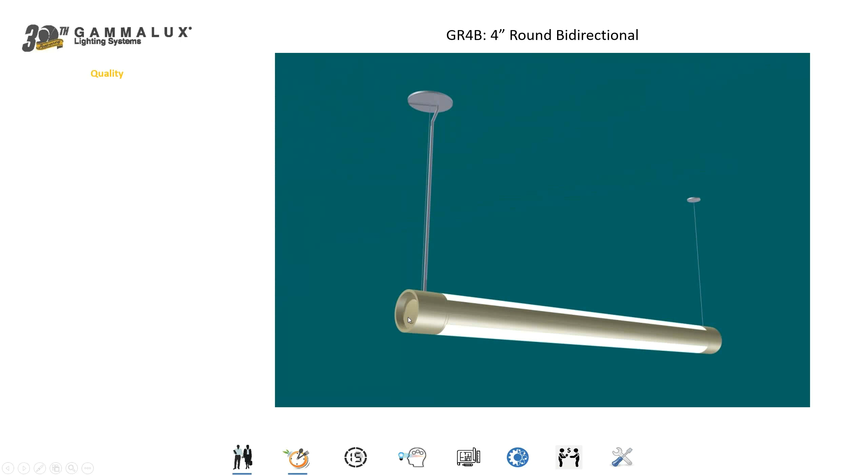In addition to our 2.5-inch wide round, we also are working on a 4-inch as well, which is bidirectional illumination and also rotatable. So now you can rotate it to illuminate the walls instead of just the ceiling and the floor, maybe in a corridor.

The G-beam portal fixture is one of our newer designs where we're taking a G-beam housing with all of the capability to integrate that G-beam housing into all kind of different ceiling systems, wall systems, furniture systems. But rather than having that white lens in the bottom of the fixture, we replace that with a backlit acrylic.

Now, we are not the first manufacturer on the market with this product. The Mark Fin was the first product on the market, but we believe it had some aesthetic problems with visible fasteners and screws and such that you can actually see through the acrylic block. It's not our idea of a good aesthetic.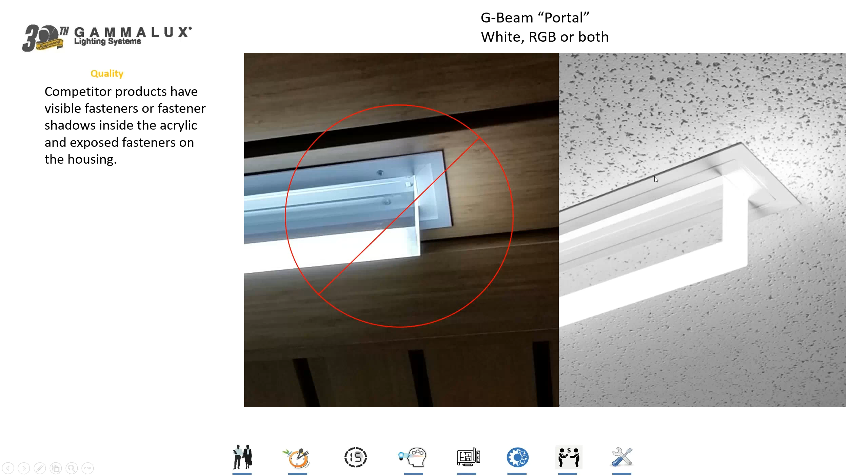So because we were not the first to market, we felt we needed to do what we could to improve the aesthetic, and we believe we've accomplished that with no visible fasteners on the fascia of the fixture, no fastener shadows, or any fasteners visible inside the acrylic itself. Now, these fixtures can be built for use as individuals or in continuous runs of any length.

Now, if you go with continuous runs of standard 4-foot increment lengths, then your acrylic blocks are going to have about a 2.5 or a 3-inch gap between them. But if you want to do custom length fixtures, we can actually offer you custom length blocks with the standard gap between, or we can use standard length blocks with custom gaps between. So it just depends on what the dimensions are in your space and what kind of effect you're trying to create will determine how we build the fixtures.

But again, these are Gammalux G-beam fixtures, so of course they can be mudded into the gyp or installed with a cover flange, or they can be installed into any grid ceiling system, wood ceiling systems, metal ceiling system. It doesn't matter what the ceiling system is because this is a G-beam product. We can interface with any ceiling system and even integrate into furniture systems as well if you require that.

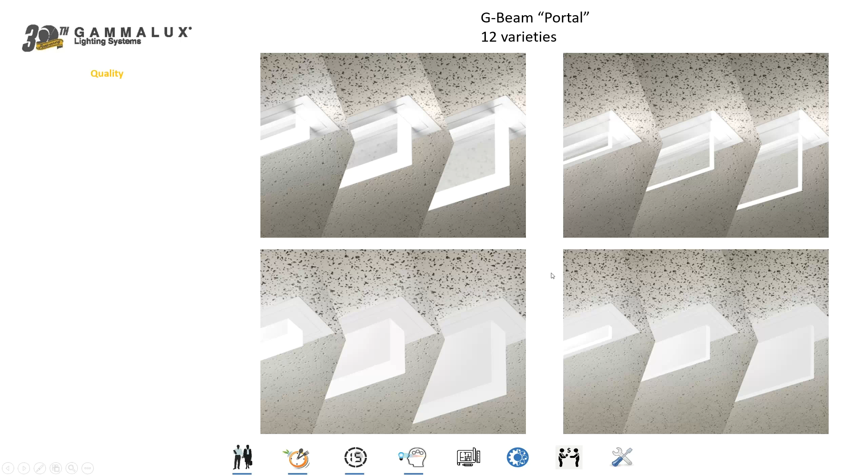Now, we have 12 different models for the acrylic block, ranging from an inch exposed to 3 inches exposed. Then we have 1.5 inch wide blocks, and then we have 1/2 inch wide blocks. We offer 3 sides frosted where the long sides are perfectly clear, and then we also have 5 sides frosted. So all those combinations, a total of 12. We will entertain the possibility of doing different dimensions in these blocks, but we'll look at that on a case-by-case basis.

All of our LED fixtures offer color changing capability on DMX control. Now, if you want RGBW, usually we don't like to do that because the W, the white element in those RGBW strips, tends to be very weak and kind of milky, and we really don't like that. So what we offer in our specification sheets is RGB plus W, where the white is a completely separate high output capability circuit, so that you can have separate control of the white.

So say, for instance, you're doing a hotel lobby or something like that. Maybe during the main operating hours, you've got several of these fixtures in that hotel lobby, and they're doing different color changing schemes and whatnot. But at 2 o'clock, 2:30 in the morning, the cleaning crew needs to come in. The color changing isn't going to be very useful to them, so they can flip a switch, turn on that white circuit at high output, and now they've got all the illumination in the space that they need.

Or maybe you're doing a bar or a nightclub or something like that. Again, you got multiple fixtures doing all different color temperature, color changes, but then when the bartender wants to go home, he flips a switch at 2 o'clock or 2:30 in the morning, and the white circuit comes on, and now you know what happens at a bar.

When they turn on the white lights, it's time to go, right? So functionality from these systems is not just a decorative piece, but it can be used as a fully functional lighting system. Now, we can also have those acrylic blocks laser etched, and now you're creating signage for your customer even when they don't have a signage budget. I'm not talking about little exit signs. This is a usable lighting fixture generating up to 750 lumens per foot.